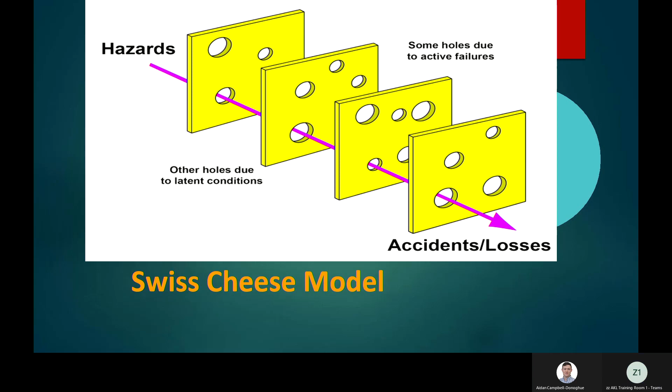Load paths - almost always a problem, mostly in the lateral resisting system, because if you stuff it up for the gravity system you find out during construction. Still, eccentricities - surprising number of jobs where these haven't been considered, either in modelling or analysis, when trying to isolate the separate parts of the building.

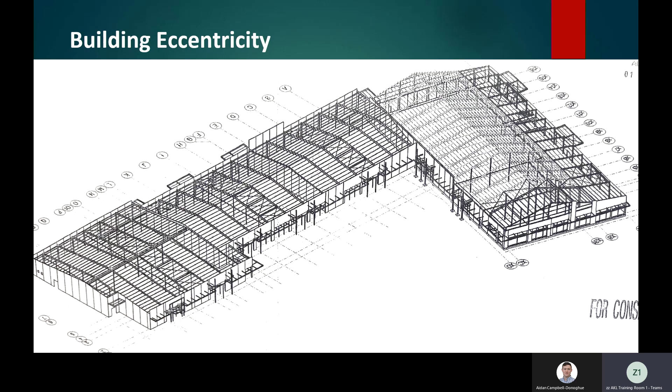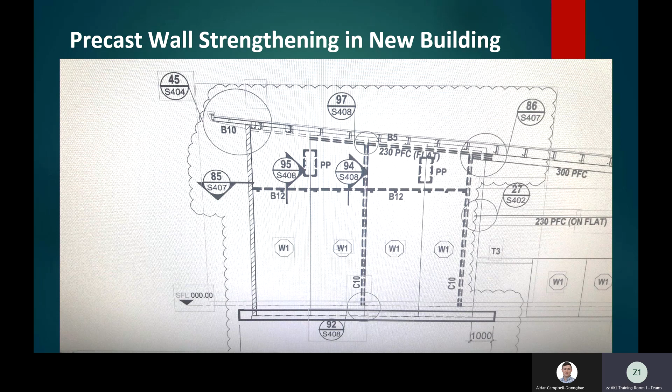Structural support - here's quite a modern building. The dotted lines you see are the retrofit supports required for the 10-metre high panels. Another recent building - you see the panel on the far left, it's got no upper lateral support.

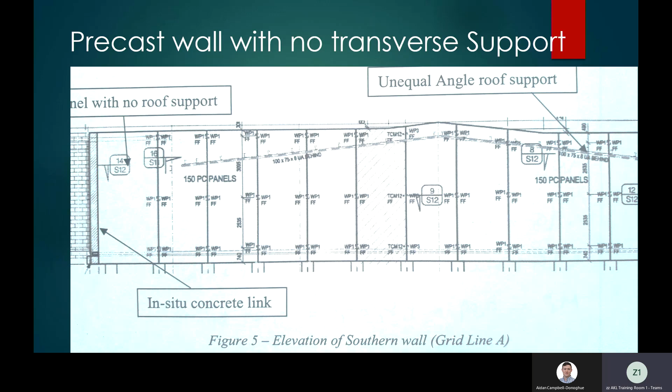Foundation - this is a tilt panel wall. The dark outline is the additional retrofit structure required. This sort of detail, the original detail, is one I've seen quite often. Think about it and look at it - it doesn't work.

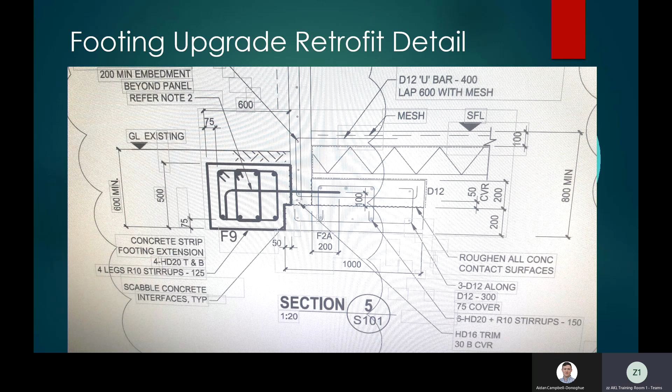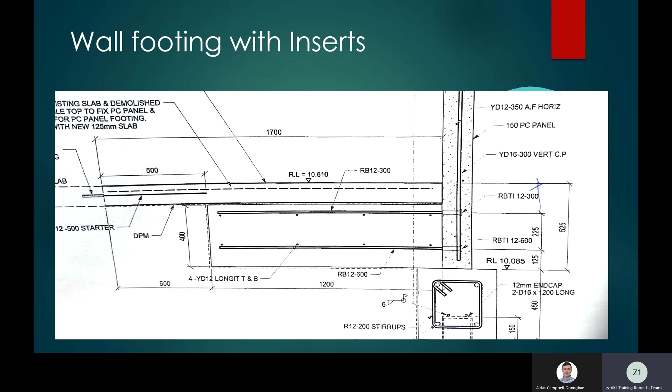Foundations - most of you will be familiar now with the findings from University of Auckland, Hogan and others, on the use of inserts, the threaded insert detail. We look at it there, taken out of their strut and tie model. So these give very low capacities. I think the jury's still out, in fact, whether or not we should be using those - but that research is ongoing.

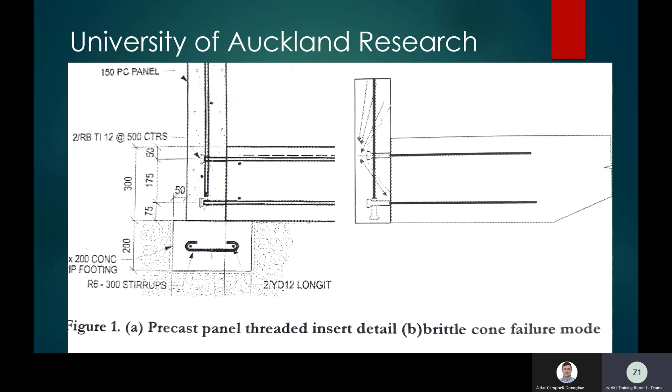Another one, people assuming base fixity without really considering what's happening, the deformations in the base plate and the bored pile, and they're usually short for soil structure interaction.

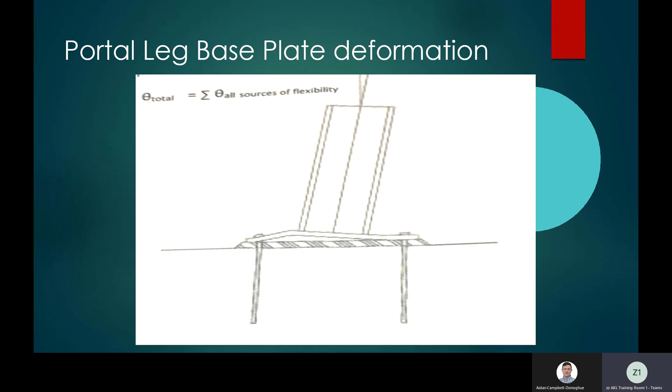This is a very common detail for support, transom support or waler support for a concrete precast or tilt panel. See there that the channel section is really only clamped in place on one flange, little torsional or twist restraint, and most of these just have a simple fish plate, a couple of bolts at the end where it connects to the portals. The problem is the designer hadn't taken account of that. They assumed it was fully restrained. I found that in probably about 15 or 20 buildings, that same detail.

The other thing on those panel connections is that very often they weren't designed for the actions under the parts provision.

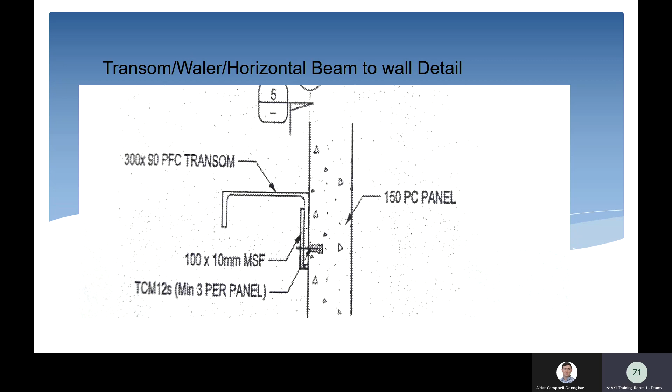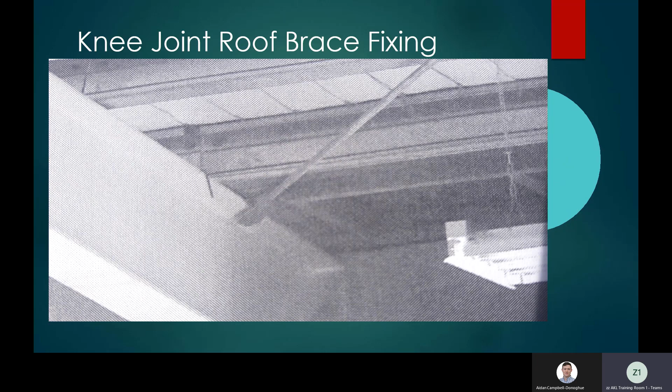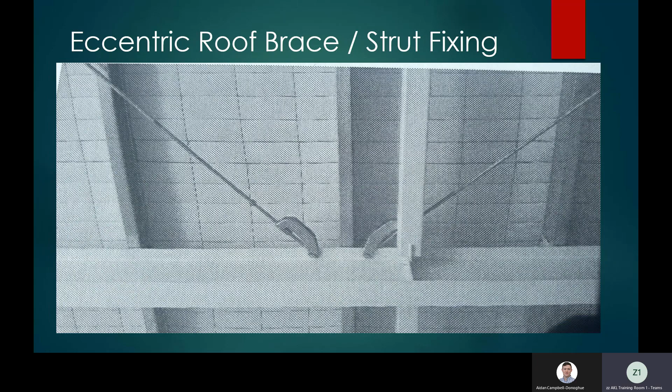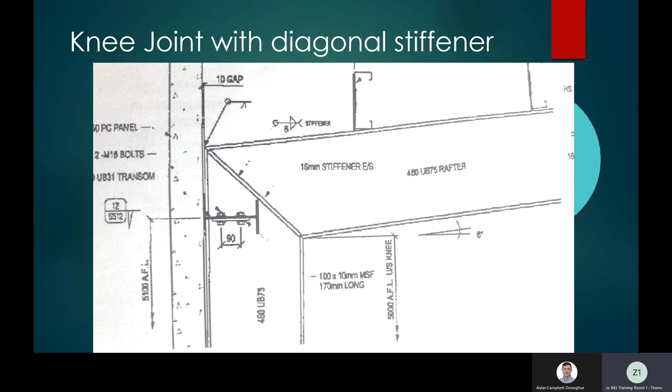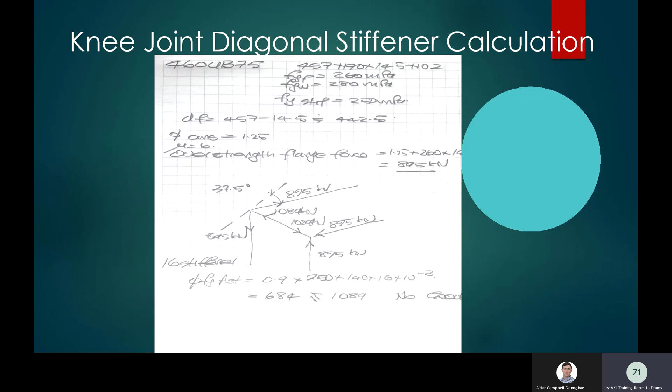Thanks to John Sterry and Michelle Grant, we've had quite a lot of discussions on the appropriate ways to analyse this, and our analysis is simplistic. Jeff and people like him will know far more refined methods than that.

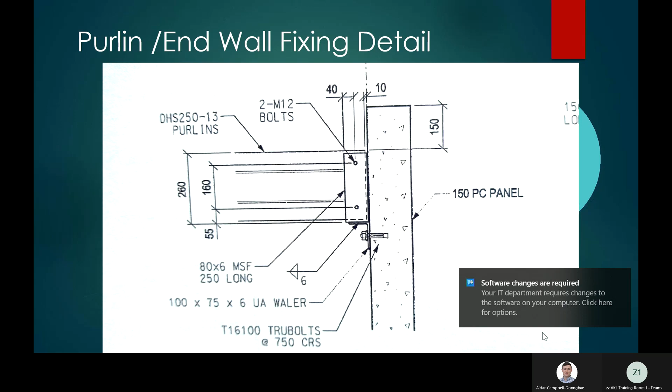This is a gable end wall. See that the purlins, the bracket, brackets fastened to the wall with a Trubolt. A couple of issues - one is that the designers assumed the wall was propped. How does that work? There are eccentricities in the purlin acting as a strut connection. It's also got non-seismic rated post-installed Trubolt anchors. Without it, it's not a good detail. Again, they haven't bothered to use parts.

This is the remnants of a communication tower I was talking about - the top, almost half of it, a 60 metre high tower, quite a significant structure. When I first walked on site, it struck me the bolts on the flange, the holes seemed small and not enough of them. Sure enough, when we came to do the reporting, that was the case. And then we found the bolts were grade 4.6, so just inadequate. Of course, the failure mode should have been flange bending or some yielding rather than bolts popping, but sadly that wasn't the case.

Foundations were anchored into the ground, post-tensioned, fused into block anchors, and because of the design we had to do quite a lot of strengthening on the base. Luckily, the foundations we ran tests on held up for the IL4 loads. What we found with the flanges, the only way we could get them to work was to use very thick washers, like 20 mil thick, to make sure we could get that failure mode we wanted. We made sure there were plenty of bolts to make sure we got the flanges yielding for the failure mode.

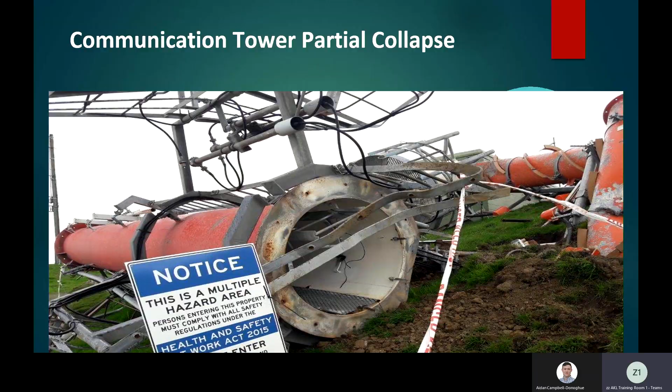Local wind pressures - now I've seen lots of designs, and I'm guilty myself, of not taking into account local wind pressure. I've probably got away with it because I'm pretty conservative on the design of the purlins and the girders, so every job that's been reviewed I've come away okay. This particular case, a very modern building, we retrofitted it quite extensively with DHS fixed to the bottom flange.

Another case, fairly uncommon, this one - an over-reinforced wall connection. These wall connections, on a single-story office building, were designed as cantilevers for both in-plane and out-of-plane actions, and cross-back connections to the ground. Because of that, they just had far too much reinforcing in the panels. They're going to give a brittle failure mode.

Can I just ask one question on that one? Sure. Are you saying wind uplift, so they didn't have stability on the bottom flange? There's just not enough capacity. Just not enough capacity even for downlift? Yeah.

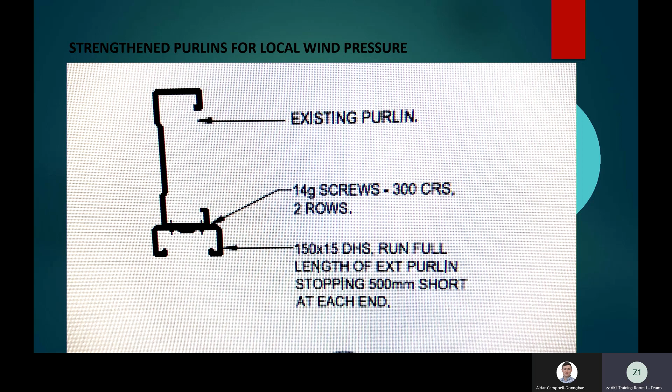Lack of roof bracing - well, this one's quite hard to believe. The roof structure where the blue is, it's not continuous, it's in a different plane. So it's just not continuous bracing.

Another example is concrete block walls. I'm not sure if the engineer designed them as a cantilever, they're inadequate for that. He designed them for a prop. There was nowhere for the loads to go, part of the structure was braced.

I found poor design, and I'm no expert about this, but I'm constantly coming across poor design or detailing of openings in diaphragms. I think most of you have been to the Strut and Tie seminar, which gives you some good tools on how to handle that.

Another mistake of mine: a long time ago I designed a farm bridge in the King Country, a two-span thing. Three years after it was built, the piers leaned over because of flood debris, and I made the fundamental mistake of not taking that into account, either with a guarding structure or by designing for those loads.

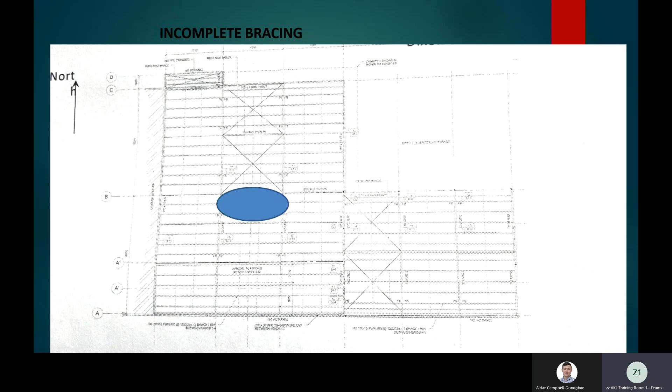Another one of mine, this is real confession time, not that long ago. You see the portal frame - most of them have just got ordinary columns, but that one in the middle has got a horizontal beam going to 2 posts. This was discovered during erection. That portal frame went over a bit, and luckily it was at the erection stage, so we were able to just pick up the braces and pull it back again. But I think the important thing there for me is to always think about deflections, how your structure's deforming, and how different parts of it are deforming.

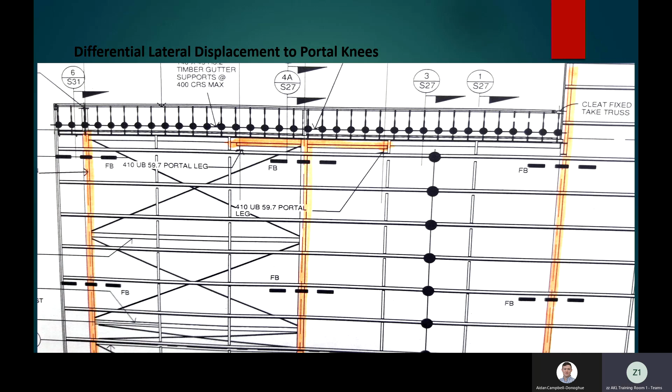Portal frame restraints - this isn't that clear, but you might see the greens where we put in additional fly braces. This is part of that building, the eccentric building that I showed earlier on.

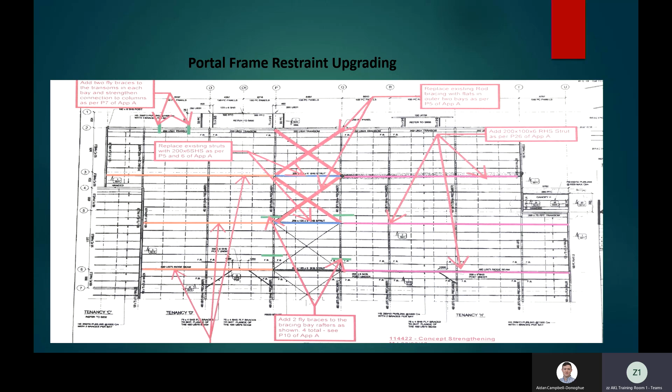This was a bulk retail centre in a city. I came across it because of the initial earthquake assessment. We just completed a couple of million dollars worth of retrofit. Not just that, but you can see other stuff that wasn't very well done.

I can spend a little bit of time on this building. It's actually two buildings. Across the bottom, onto the floor, going up and down, there's another wall. You can see the bracing, or lack of bracing, from the previous slide.

Ourselves and another firm of engineers carried out a detailed assessment of this one. Not sure if it's out of court yet or not. The first mistake they made was adopting a K mu of 2.25 instead of 1.25.

Just a quick arithmetic writing-down mistake. In addition, for parts of the structure they'd selected a ductility factor of 3, but failed to meet the detailing requirements. The transom beam, the example referred to before, that reduced the strength to between 15 and 55% of what it should have been, depending on where it was on the structure.

Steel portal frames - not enough bracing against buckling, not enough fly braces. For the base plates cast into the floor, they assumed full fixity. The steel section they assumed was non-compact, which requires special consideration. So the strength of the frames varied between 26 and 60% of what was required.

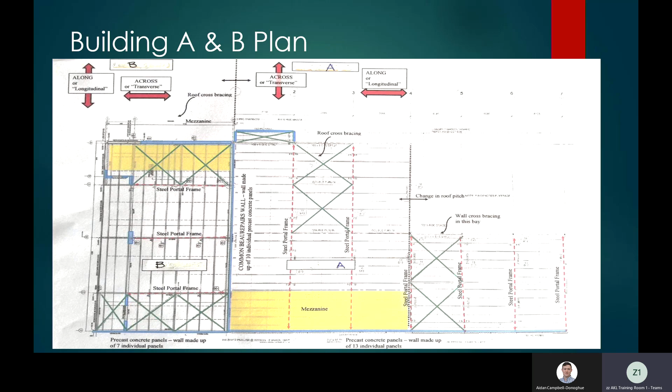Inadequate quality assurance review is often compromised by rushing. Also, some of the QA peer review stuff internally trends us towards tick box rather than looking at what's happening, the structural behaviour.

For me, the wider use of computers and spreadsheets made it easier to do analysis but harder to visualise how the structure's actually behaving. When I started off, we did distributions and things like that, and doing that you got a really good feel for how the structure was behaving. It's carried me in pretty good stead since.

So I think even a simple check is just a bit of a look, a few stick drawings - how you think the structure is going to behave, and is the drawing and the design tie-up consistent with that.

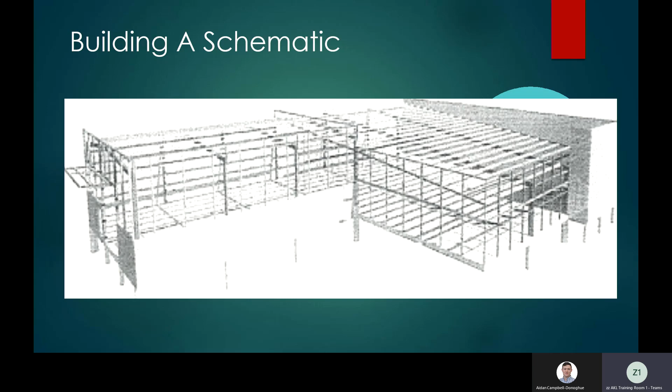So that introductory webinar, which I'm going to be part of, I'll talk a little bit about human factors and how they influence some of the mistakes that we see. So to learn about mistakes, first of all, we've got to know about it. For far too long in New Zealand, people have been hiding their mistakes.

So first off, you've got to know it - you understand the mistake and how it came to be, and the nature of the mistake. You have to want to change, and you have to do something about it, either change your own behaviour or whatever.

How many of you belong to CROSS? Any of you? CROSS is Confidential Reporting of Structural Safety. It started in the UK, I think as a result of the aviation or NASA stuff, sharing mistakes on a no-blame basis. Now CROSS, Confidential Reporting of Structural Safety, became an Australasian operation in 2018.

And just recently, I've been appointed as one of three New Zealanders on the panel of CROSS, where we assess the different reports. So I'd urge you all to subscribe to CROSS. Just search CROSS-AUS to get to the Aussie site, or if you just search CROSS, you'll get to the UK site. Join - it's free, with heaps and heaps of useful information.

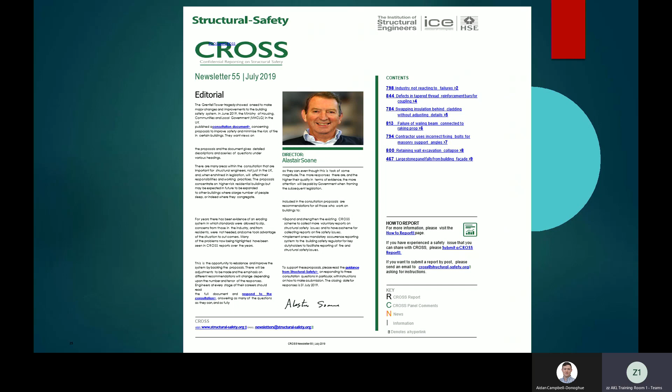So what can we do? What can you do? First off, sharing your work - share in discussion groups if you're a reasonable sized organisation.

I belong to one in the Waikato - we have a lunch meeting once a month, swap around, and there's about 9 or 10 of us that attend. When I came up here about 15 years ago we started the group. Rodney would meet for morning tea on the first Friday of the month, and that group led to the formation of a general practice engineering special interest group. Anyway, in general practice that's a useful group.

Share with your structural group, the Auckland structural group. Write a brief article for the SESOC journal - Stuart Hobbs, the editor, would love to have even a 2 or 3 liner about what you learned.

Subscribe to CROSS newsletters, and try to promote a just culture in your workplace, in Engineering New Zealand and SESOC - in other words, try to encourage reporting on a no-blame basis of incidents and mistakes.

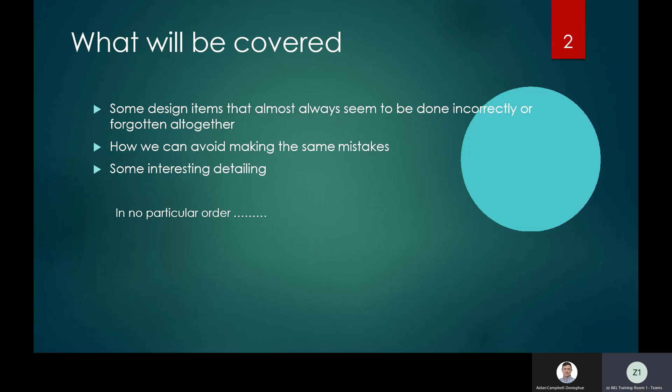Some of the lessons that they've found - some of the stuff is a little bit technical - with suggestions on how to avoid making the same mistakes.

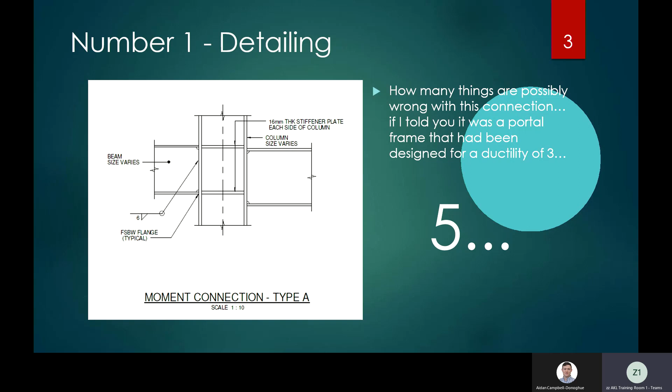If we had a beam framing into a column the same size, how many of the standard UBs would not require a doubler plate? At the moment, let's say close to 80%. And for the same arrangement with standard UCs, say close to 50%, likewise.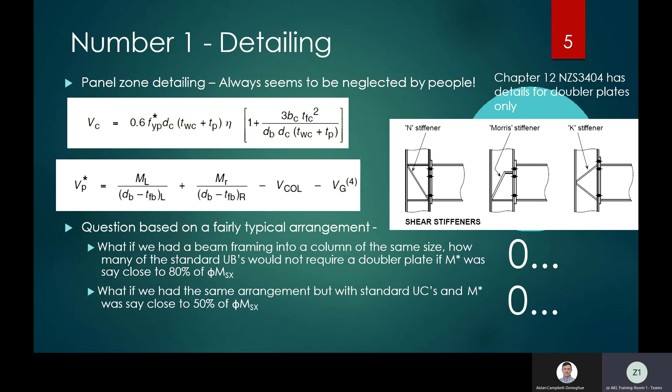This means that almost always you're going to need some panel zone reinforcement. Your column size is 2 or 3 sizes up from the beam size - for example, a 360 UB, then you can work with a 530 UB.

For a ductility of 1.25 or higher, connections and loads need to be capacity designed, with actions based on either full overstrength of the beam.

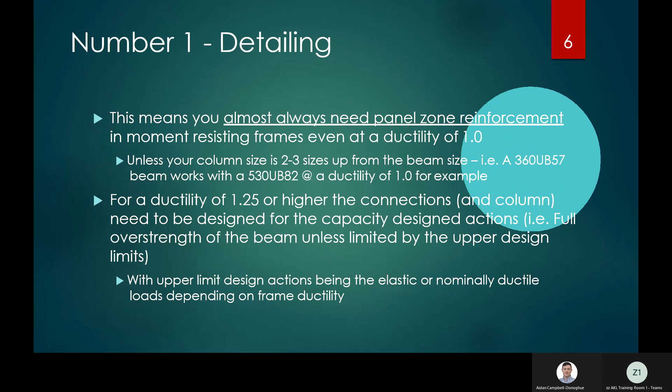Just to make a comment too - your panel zone is not only for strength, it also has a big influence on stiffness. So if your panel zone is only sized for strength, it has a big impact on your midspan deflection.

Thank you. Detail - it's fairly obvious there.

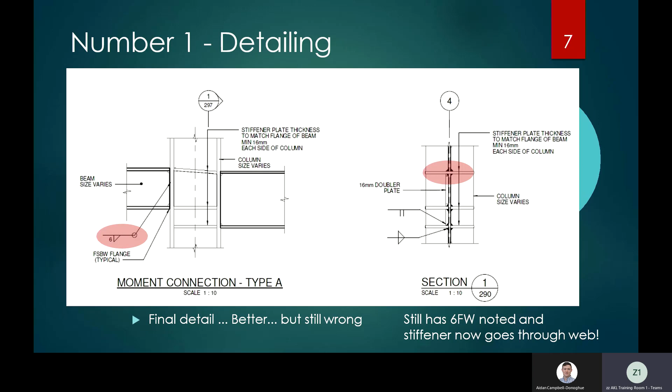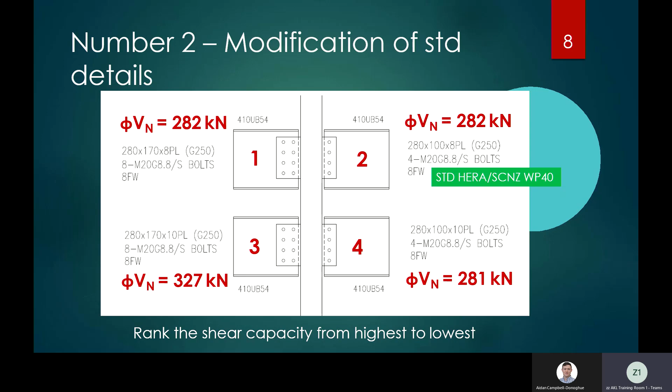This one is about being careful about modifying standard details. So if you're putting in extra bolts, or a 350 plate, validate the original assumptions - be careful about that.

Don't design by guesstimating without evaluating the effect of the change - for example thinking more bolts means more capacity, thinking thicker plates means more capacity, or higher grade plates means more capacity. In some cases you invalidate some of the governing criteria of the connection model.

With more bolts you may not even be governed by bolt capacity in the first place - for example, with thicker or stronger plates, you may force the bolts to become the critical failure mechanism.

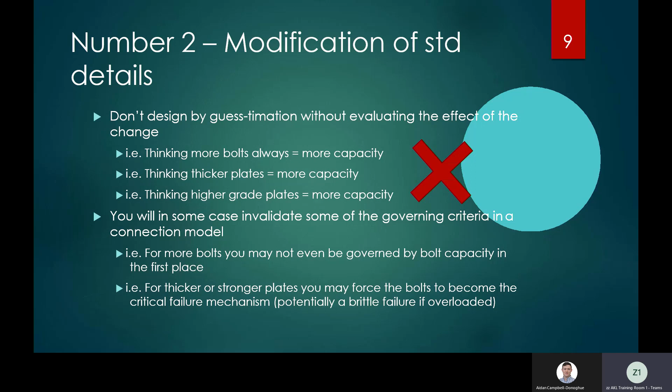How do we avoid issues? There's a few tips. Don't modify standard details if you can help it. Actually check and design any modifications, especially if you're pushing the capacity of the details, or the connection is part of a primary lateral load resisting system, and you're relying on it.

Understand the implications of changing various parameters. Be familiar with the design model, don't just play with it. It's always good to work out the capacity by hand a few times to understand the design model and get a feel for what you're doing. Always design to the minimum design actions from 3404, to impart a minimum degree of robustness to the connection.

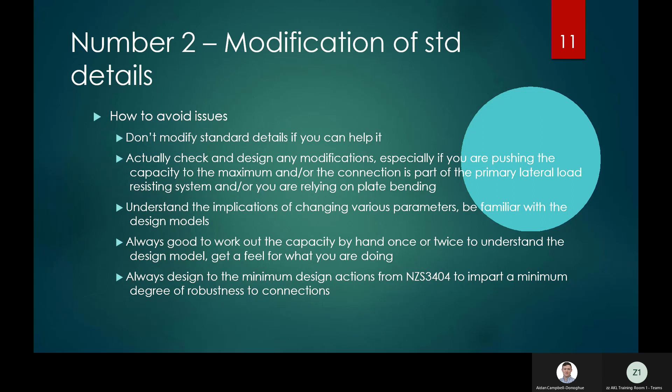So for the application of standard details, here are web plate connections designed for grade 250 plate. Where the web and plate are less than 9mm, Threads are excluded, assumed for the bolts, typically beams less than 460 UB only have 8mm plate. Welding for web plates is designed to yield the cleat before failure of the welds, so increasing the thickness of the plate can easily invalidate that assumption.

Here are tension compression splices detailed for end bearing and 250 plates. Introducing a gap for construction tolerances can invalidate the design model. So mostly you already come across fabricators saying, oh, it's 300, it's easier for them. Be careful.

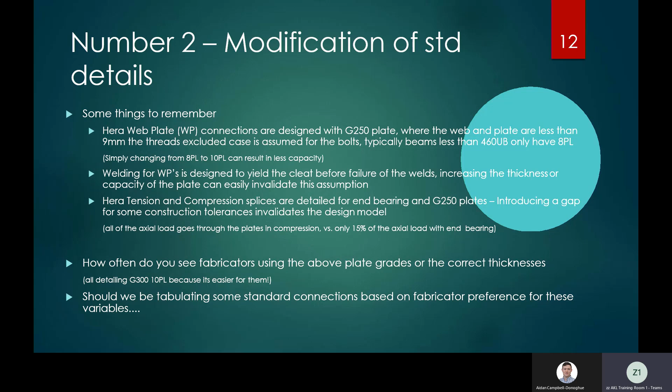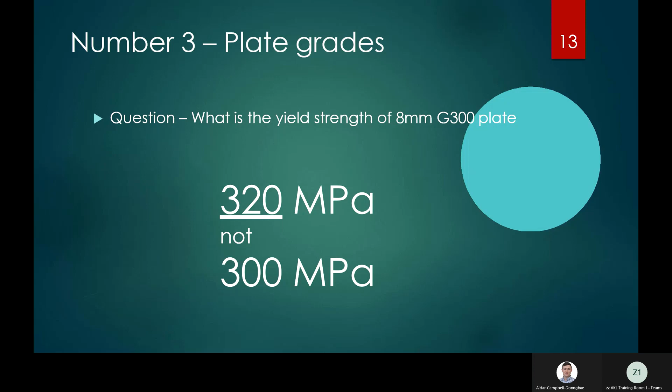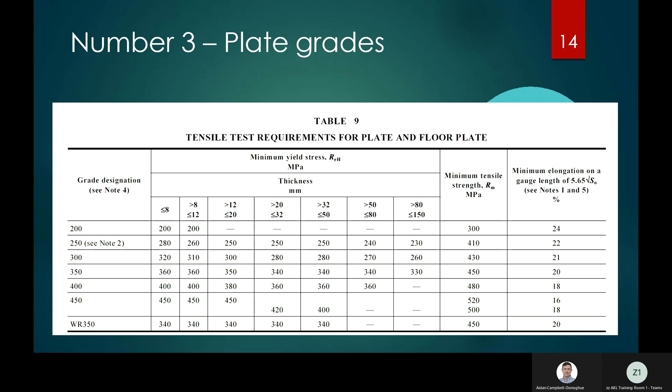Plate grades - so what is the yield strength of an 8mm plate? It's 320, not 300. Different grades again for hot roll sections. This is something that I have found fairly frequently in reviews, just to make a difference in the strength capacities.

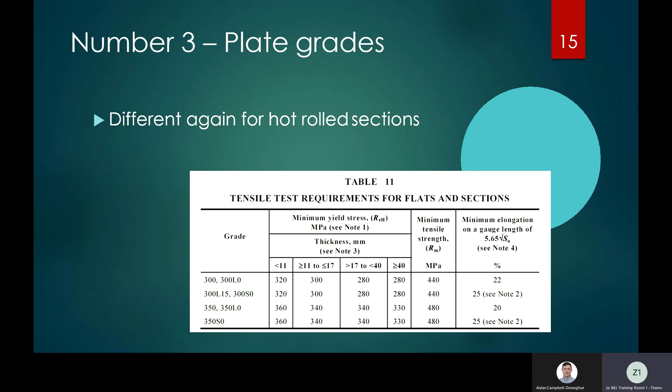Angle design - a 100 by 100 by 10 angle is 9.5 mil, the thickness of 100 by 100 or 6 mil. Just got to be careful of that sort of thing. And then for angle designs, if you're using the Australian Steel Institute standards, just be careful because the assumptions on eccentricity and things are in excess of what New Zealand standard allows.

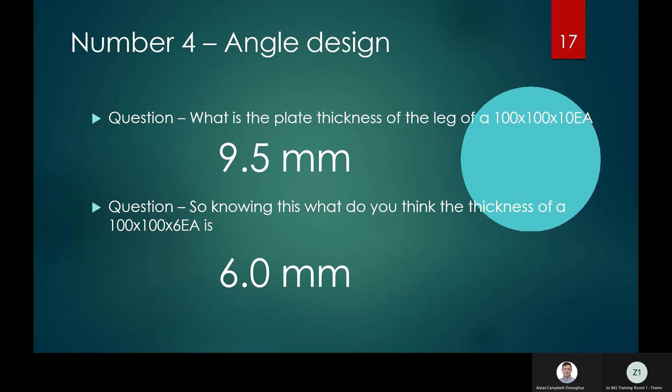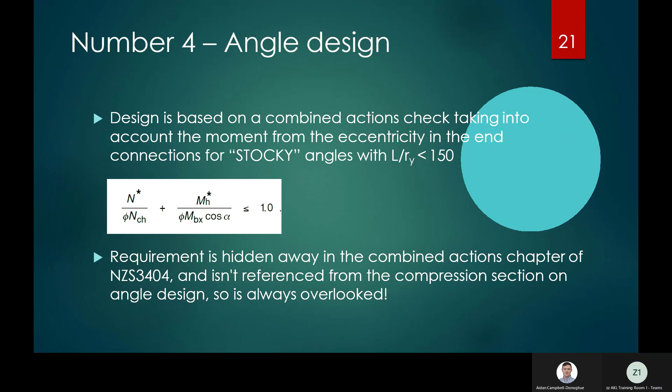Just cover it in the next couple of slides. Member restraint - it's a big one. Not good enough just to put in a fly brace in the roof or a floor or whatever, without thinking where are those loads going to? How are they being transferred?

Peer reviews have found this quite frequently, so you get back to this principle. You've got to have first off a restraint that's stiff enough for displacement - depends whether you're talking about flexure or compression. Overall, you've got to have it going somewhere, to a solid point.

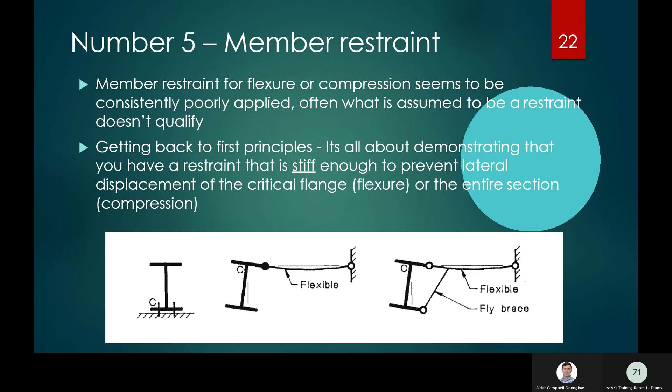A couple of slides on that, I'm not going to go into detail. Just be mindful of it. You know, it's really easy, I find, doing your analysis while you're chucking some fly braces, to keep going without asking where are they going, how are they going to get those actions out.

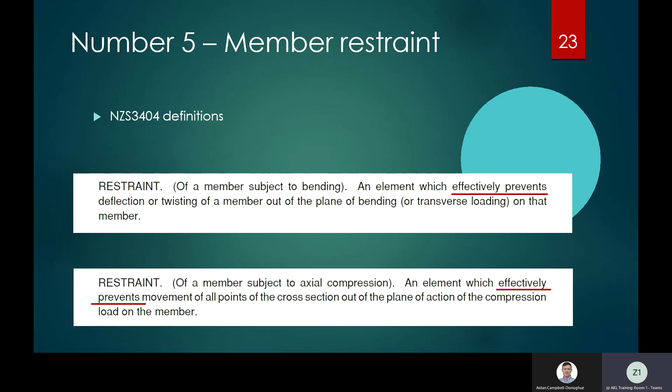Restraint - this is probably something you're all familiar with. Stiff versus flexible, and what happens with your critical buckling.

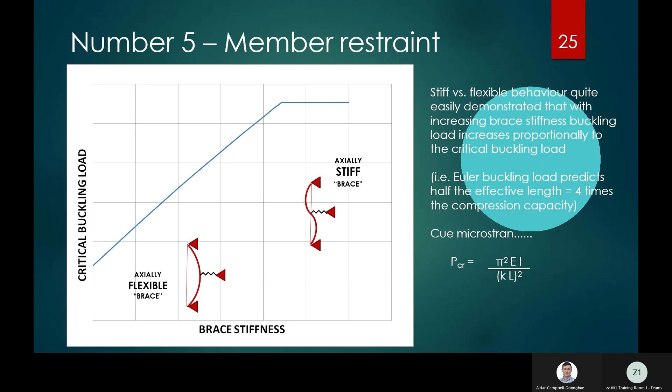One example that they found - people are relying on restraints, the classic example. You may see more often in the purlins, magically providing lateral restraint to beams, designing the beam for a segment length equal to the purlin spacing. Simply adding a fly brace doesn't necessarily constitute a restraint. No load path provided.

Reliance on lean-on bracing systems without meeting stiffness requirements can force higher modes of buckling behaviour. For example, using an adjacent beam to resist the restraint - this can work, but only when the adjacent beam is approximately 20 or 30 times the minor axis stiffness of the beam. So we're still simply assuming restraints in the calculations achieve the capacity, but there are no signs of restraints on drawings. That's something I mentioned earlier on in my talk.

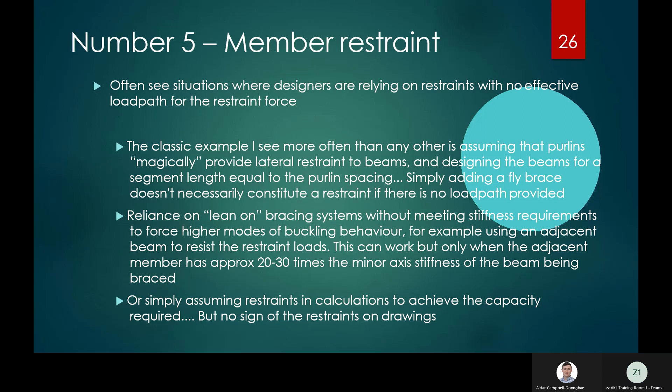When considering member restraint, don't forget the restraint forces accumulate - you need to take care of those.

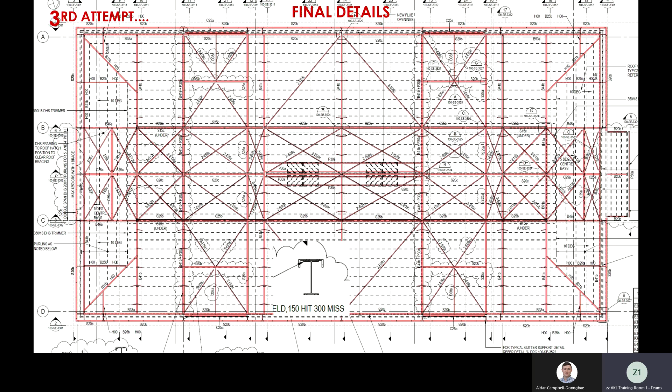So for me, there's one message I'd like you to take away tonight: firstly, admit you've made a mistake. We all just want to hide it, wearing our tails between our legs. But don't do that - share it. Talk about it with one of your colleagues or one of your groups.

That way, I think we can improve the profession. Because if we don't do that, we're going to repeat the mistakes that we've made. There's quite a lot of evidence that there are intergenerational mistakes - 25, 30 years, a whole batch of the same sort of mistakes were made 25, 30 years ago. That's because the older engineers retire, and younger engineers haven't made those mistakes yet - it's their turn. So I think if we can, the ability to share mistakes is an important thing.